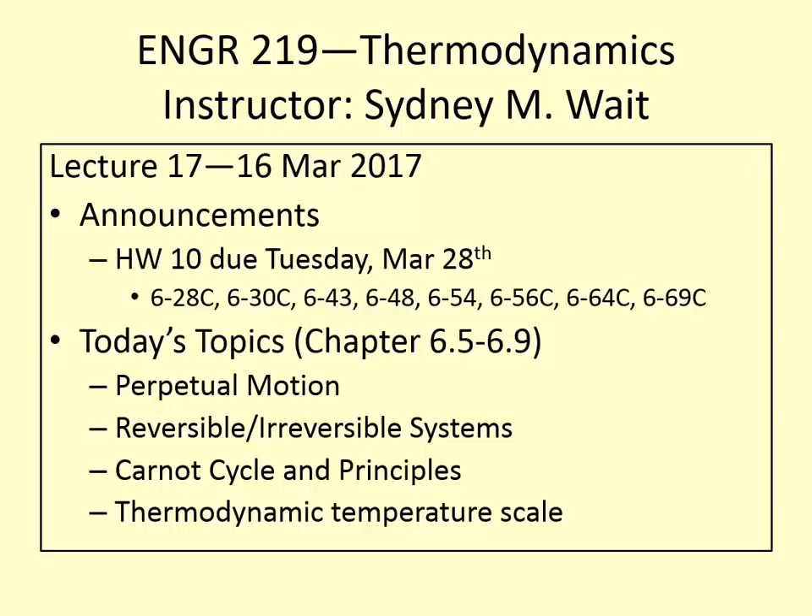But you must be in the photo, so I don't want you to just go on the internet and grab a photo of a wind farm and say, I saw a wind farm on spring break and here it is. No, that's not going to work. You need to be in the photo so that I know that you actually witnessed it, you saw it, you found it, you went out and searched for it. So again, this is all bonus points. And then you submit a one-page write-up discussing the energy setup. So if there are any interesting details that you know, that possibly whatever company it is has some facts on their website about what they're doing, or if you know or can look up information about solar panels or solar arrays in general, then just do a one-page write-up that has some interesting details or facts about it.

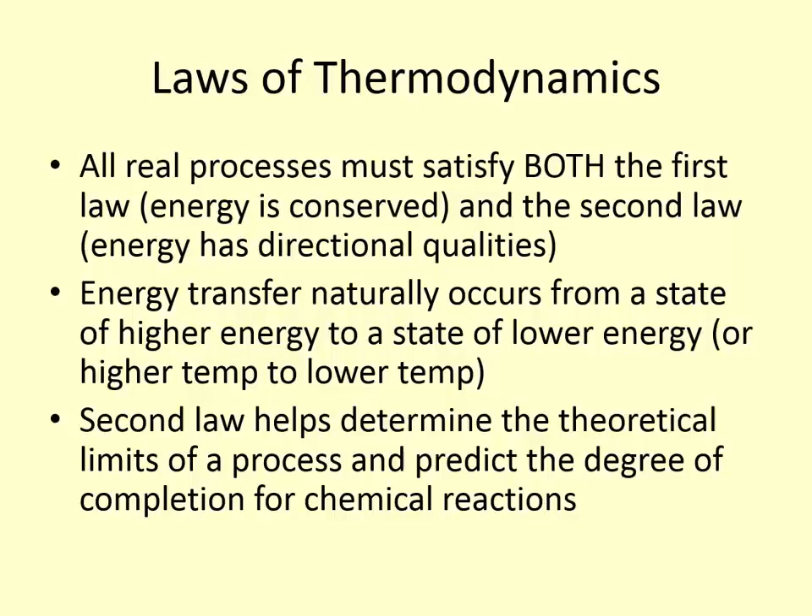So in many cases, the perpetual motion devices or the theoretical machines that a lot of people present, they work from an energy balance standpoint. They satisfy the first law. And so it's a little bit more difficult to understand right offhand why something like that can't work. But if we're also looking at the second law and understanding that energy has direction, then it's a little easier for us to look at those things and understand.

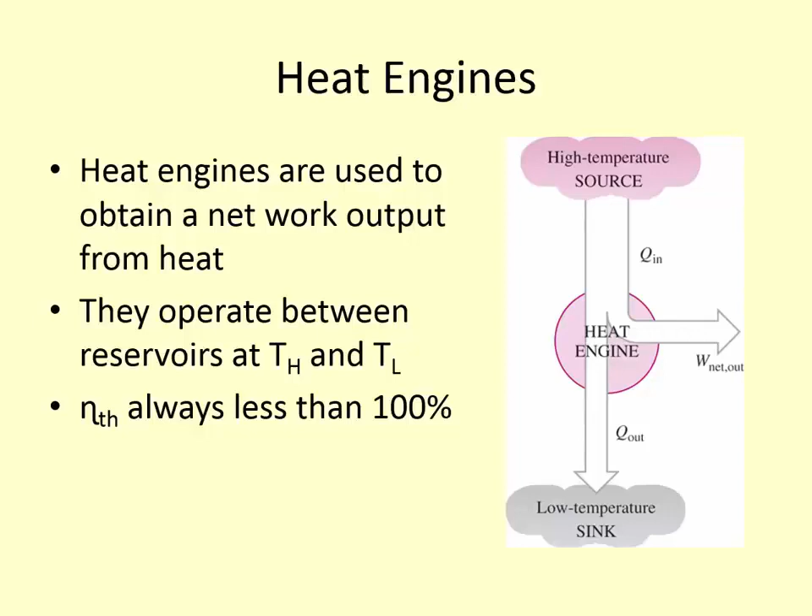So heat engines, that was the answer on the first part of the quiz. It's the necessary device in order to take heat and convert it to work. So they always operate between these temperature reservoirs, and they always have an efficiency that's less than 100%. Heat pumps and refrigerators are used to reverse the direction of heat flow. So it requires a work input in order to take heat from a cold space and put it into a warmer space. So essentially we're making heat flow uphill or upstream, and it requires work in order to do that.

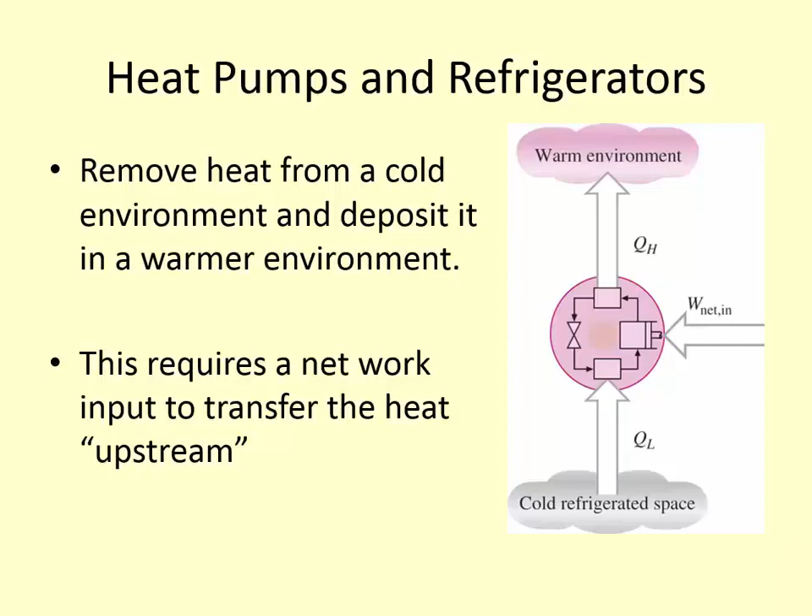The thermal efficiency for a heat engine tells us how much of that heat we can possibly convert to work, or how efficient or effective it is at converting heat to work. It's always less than 100%. In many cases, it's closer to like 30% for real processes. And then refrigerators and heat pumps have something called a coefficient of performance, which is slightly different.

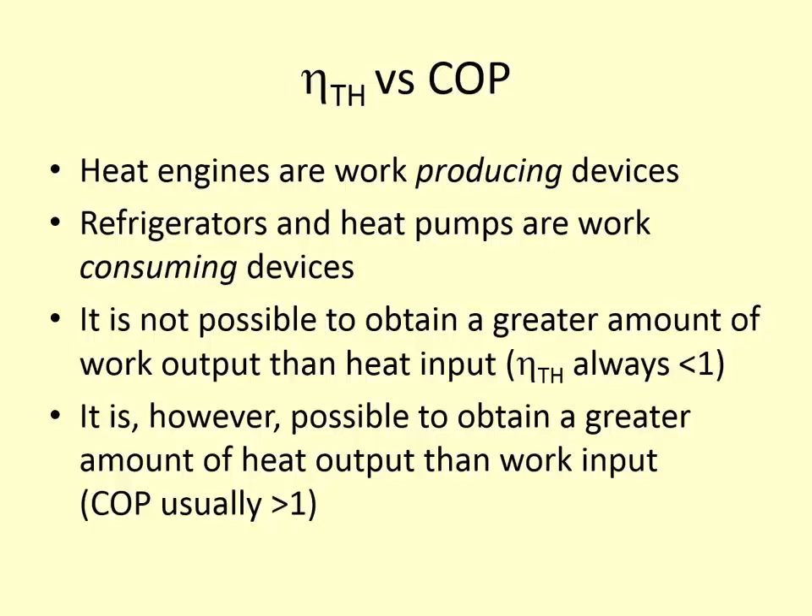But again, if we're thinking about the base definition of efficiencies and performance markers, it's the desired outcome over the required input. So if the desired outcome is to put heat into a hot space, like it would be for a heat pump, then we use QH over the work in. And if the desired outcome is to remove heat from a cold space, making it colder, then it's QL over work in. And a coefficient of performance is most often greater than 1. In fact, if it's less than 1, it means we're doing worse with our cycle than we could if we just converted all of the electricity into heat, as in the case of a heat pump.

Perpetual motion devices, sometimes also called over-unity machines, are those that violate either the first or the second law. And so because real processes have to satisfy both the first and second law, any device that violates them will be called a perpetual motion machine. And if it violates the first law, meaning it's somehow getting more energy out of it than you're putting in, then we call it a perpetual motion machine of the first kind, or PMM1. And if it violates the second law, then it's a perpetual motion machine of the second kind, or PMM2.

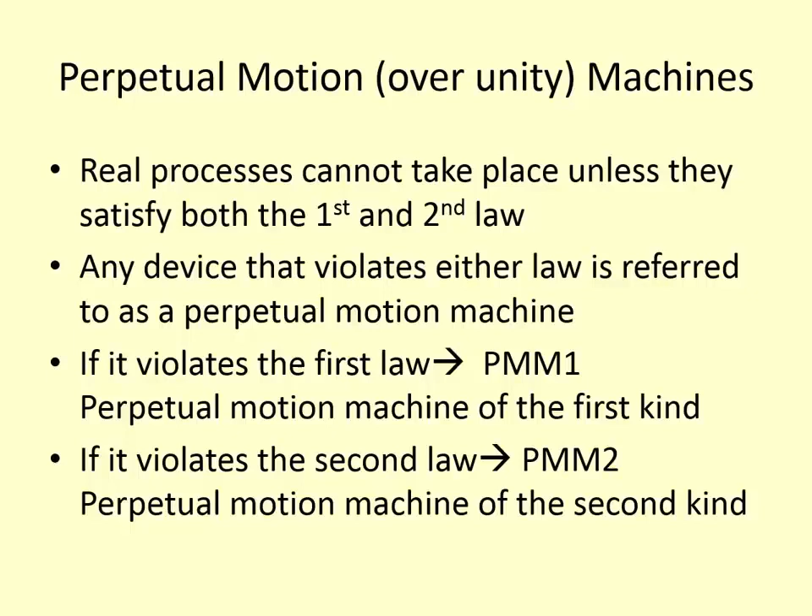So something that would violate the first law, for example, would be like if you can put 10 kilowatts into a machine and somehow you get 20 kilowatts of usable work out of it. So you're only putting in 10 kilowatts. You're not adding any additional heat, and you get a greater output. Something that would violate the second law would be like if you have some device that somehow, without any work input, transfers heat from a cold space to a hot space. So as we look at some of these machines or some of these devices, we can determine if they're of the first kind or the second kind.

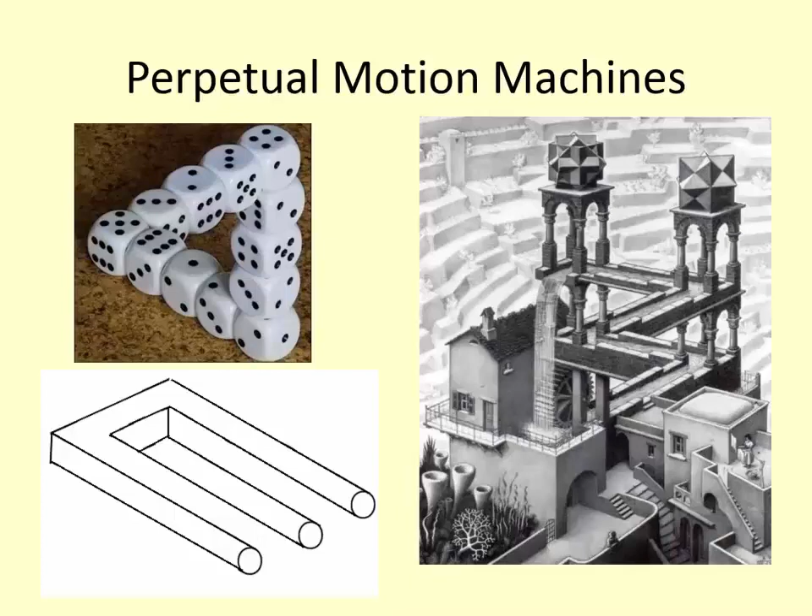And then this little tuning fork kind of thing on the bottom, where at first it looks like it's 3 cylinders, but then when you look at the opposite end, it's actually a U-shaped bar. So on paper it works, right? It's kind of a cool little mind trick, a little illusion, but it couldn't exist in real life. You can't have something like that in 3 dimensions when you consider things in real life.

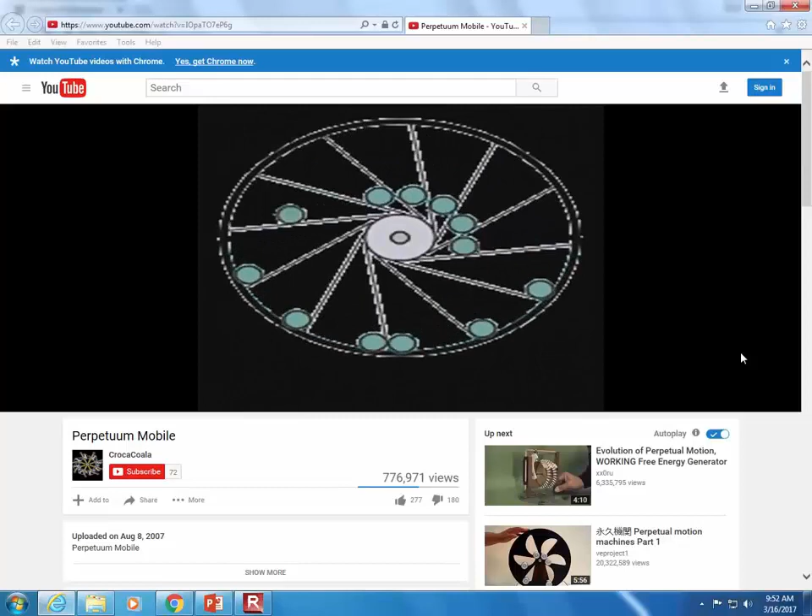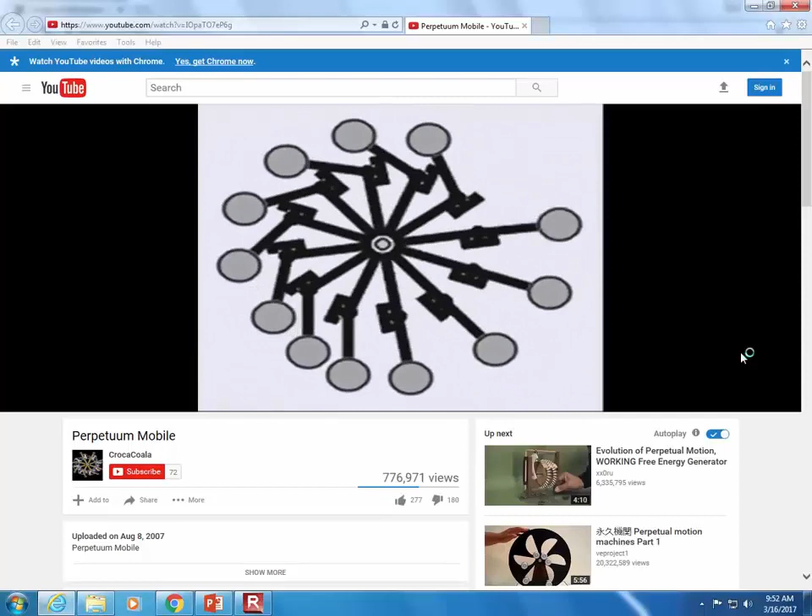Okay, so let's look at a couple of examples of the different types of perpetual motion machines, so whether they violate the first law or violate the second law. This one violates the first law, and I want you to just look at it for a minute and see if you can figure out even what's supposed to be happening in this particular device.

Right, okay, so we can look at this as just like a regular heat engine, right? So we have a turbine and a pump, and we're pumping water through this boiler, and somehow we have to heat up the water in the boiler. So the idea is then, okay, instead of using fossil fuels, why don't we just tap into the generator to heat up the water in the boiler so that we don't have to use a secondary furnace or burn anything or cause pollution? So we can just use the energy that's created by this cycle in order to heat the water in the boiler, right? Sounds great, doesn't it? Okay, so what happens if we draw a system boundary around this whole thing? What do we have?

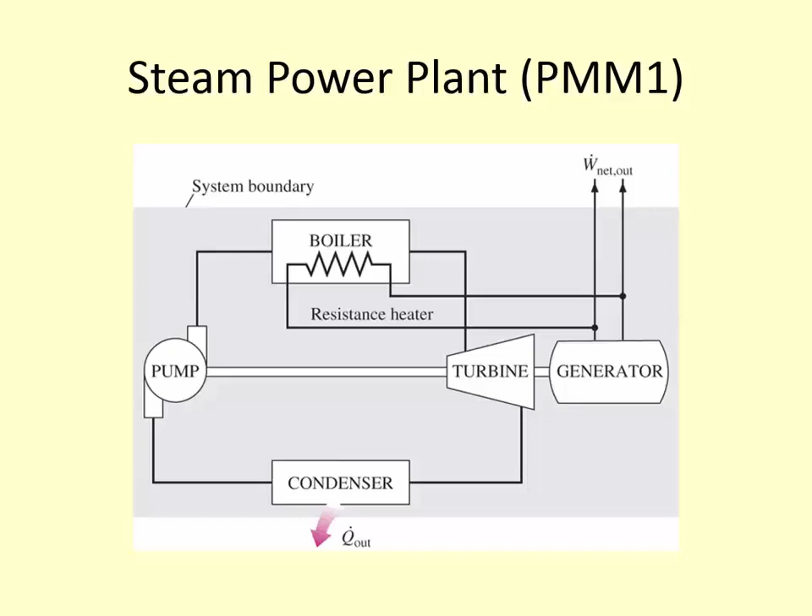Then we have another steam power plant, and we looked at this example a couple of lectures ago where we just removed the condenser and decided that we don't want to reject heat to the environment. We see that we have a power plant that receives heat from a single source and produces a net amount of work, which violates the Kelvin-Planck statement, which in turn violates the second law of thermodynamics. So it would be a perpetual motion device of the second kind, a system that cannot exist in reality. We can draw whatever we want on paper. We can design whatever we want in a computer simulation. That doesn't mean it can exist in real life on this planet.

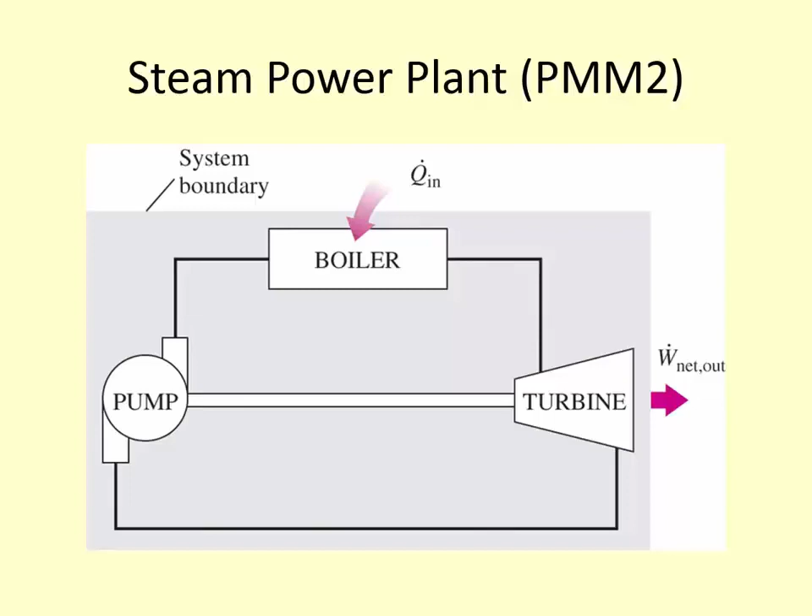So that leads us to a discussion of reversible and irreversible processes. A reversible process is one that can be returned to its original state without leaving any trace on the surroundings. A completely reversible process is one where the system and the surroundings are each returned to the original state and it's like nothing has ever happened. Internally reversible means the system can be returned to its original state. Externally reversible means the surroundings can be returned to their original state. And totally reversible is the case where the system and the surroundings are each returned to their original state, as if no process ever happened.

So what does this mean, and how does it apply to real life? Well, there are processes in real life that are internally reversible or externally reversible. There are very few, actually no processes that are totally reversible, but there are some that come to a very close approximation. However, those processes that are totally reversible are very idealized, best case scenarios, and in general you can't actually use them for anything other than running experiments. As soon as you try to achieve some net amount of work from them, or try to harness the energy in some way, then you're adding irreversibilities to the system so that it's not a totally reversible system anymore.

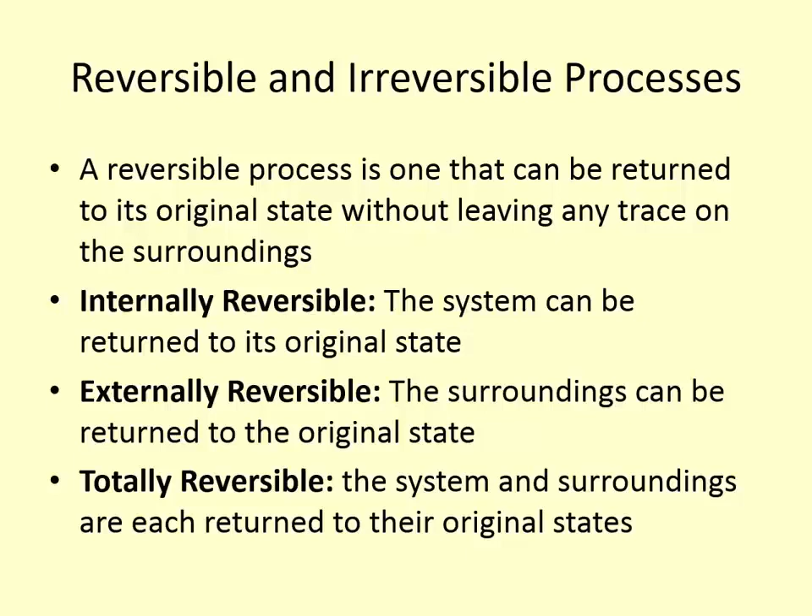A good example of that would be those spinning wheels with the pendulum weights, which can be approximated as totally reversible if they're very frictionless and we don't have any wind resistance and things like that. However, the moment you try to do anything with it, it becomes an irreversible system. You're adding irreversibilities to it. So real life is full of irreversibilities. A reversible process will provide the best case scenario. In the case of a work producing device, you'll get the most amount of work. And in a work consuming device, you will consume the least amount of work for any process.

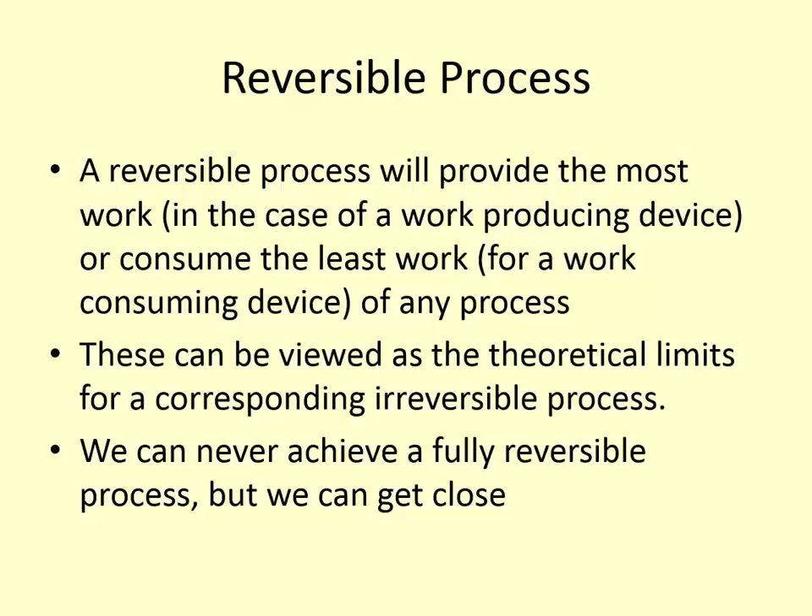So we still like to study reversible processes because they provide the bounds which we can design between. We can know, okay, this is the most amount of work I'm going to get out of this system. What I'm getting is this. Is that okay, or can I try to do better? So they provide us these theoretical limits, and although we can never fully achieve a reversible process both internally and externally, we can get pretty close. And that's the idea, that's the design process, trying to get as close to a reversible process as we can while balancing the cost of the project, because sometimes eliminating irreversibilities increases costs significantly.

So what are irreversibilities? Friction is one that we're all familiar with and probably is the first one that comes to mind. Friction is an oppositional force between two bodies in contact, and it leads to heat. Heat, again, is a very low quality form of energy. In most cases, when we see irreversibilities, it's because we have heat transfer, or somehow our work is being converted into heat. The same goes for friction—this motion or momentum force is degraded down to heat, so we lose some of our energy in the process due to heat.

Unrestrained expansion, so when there's rapid changes in pressure, it can lead to significant changes in temperature, which again is manifest as a heat loss. Electric resistance also leads to heat loss.

Heat transfer is always a one-way process, so unless we have work involved to reverse the flow of it, it can only proceed in one direction. As soon as we try to reverse the flow of that heat, we automatically lose a significant chunk of our energy, because once it's degraded from a high temperature to a low temperature, we can move part of it back up using work, but we can't do it 100%.

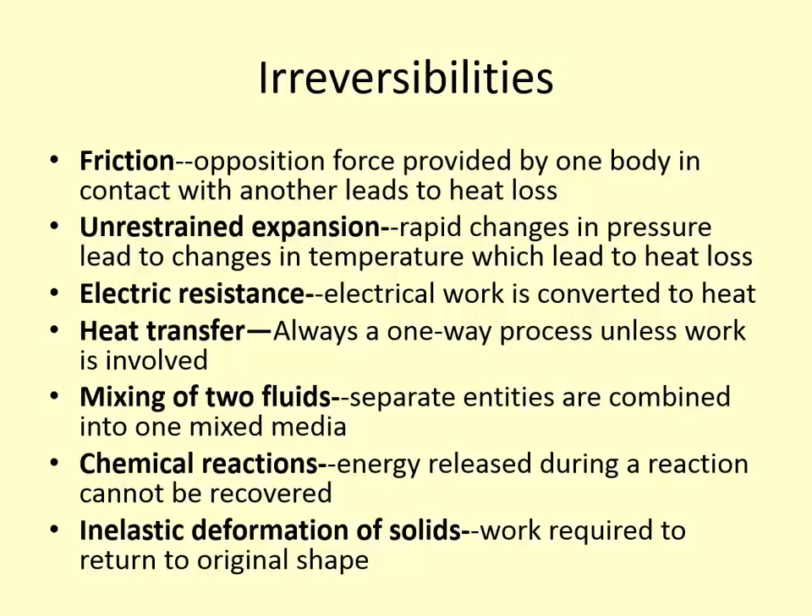Some reversible approximations are necessary in design. When we talked previously about a quasi-equilibrium process, that's one of the approximations we made early on to assume that our process was kind of reversible, or quasi-equilibrium. If we do this process slowly enough with minimal friction, then we can approximate it as reversible. The second law of efficiency will tell us how close our actual process can be to the one modeled by a reversible one. So if we look at it in the reversible case and then calculate our second law of efficiency, we'll see how close we can possibly get in real life.

The classic example of a quasi-equilibrium process would be moving wall. If we move it slowly, the water level just rises slowly. But if we move that wall quickly, expanding and compressing too rapidly, then the water begins to oscillate, and it becomes an irreversible process, because now we have these momentum forces that are causing our motion to be less efficient.

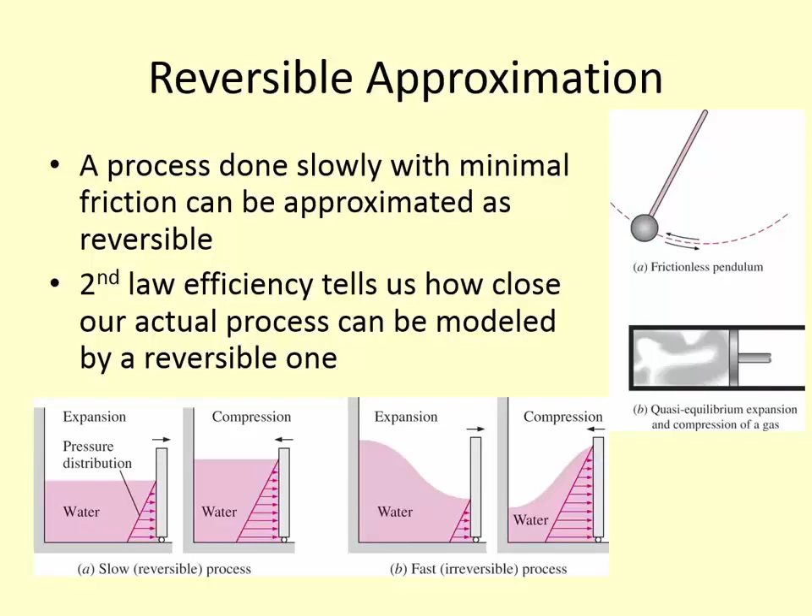Heat transfer processes are always irreversible, but as the temperature difference goes to zero, it becomes more closely approximated by a reversible process. So if you're transferring heat from a body at 20 Celsius to another body at 20 Celsius, then it can be considered reversible. However, very few systems in real life have infinitesimal temperature differences where heat transfer is concerned. So it's a good approximation, but in practical analysis and design, we don't often encounter that in real life.

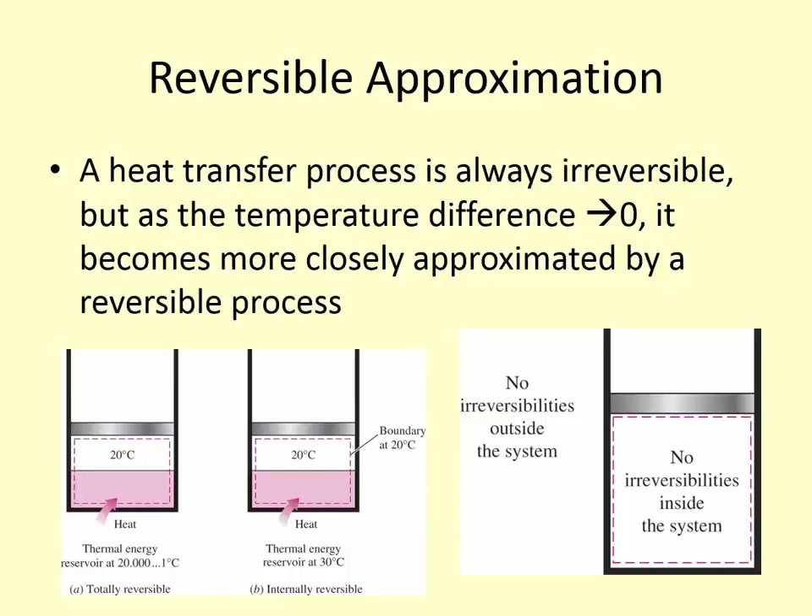So we can do our best, and say, okay, maybe our process is not totally reversible, but we can say that we don't have any irreversibilities inside the system. Our piston is a frictionless piston cylinder device. Or we can say there's no irreversibilities outside the system, that there's no external momentum forces or things like that. Again, we're making approximations both to simplify the analysis, but also to show us the best case scenario, and also to have us take special note of the things we can work on.

So if we make a reversible approximation and then run our real simulation or real analysis and we see all these differences, then we can say, okay, we assumed it was frictionless—where's the friction in our design, in our system, and how can we reduce it so that we can get closer to these values? Which leads us to an idealized reversible cycle. The Carnot cycle is one that is often used in design and analysis to give us our best case scenario.

of a heat engine, heat pump, or a refrigerator. And we first talk about it as a heat engine.

So from state 1 to 2, we add heat from a source at T sub H, and because we're doing this, we maintain the temperature as constant during an expansion process. So state 1 to 2 is reversible isothermal expansion, meaning the temperature is constant and it's expanding, so the volume is getting larger during that process.

State 2 to 3 is reversible adiabatic expansion. Adiabatic means there is no heat transfer. So we're continuing to increase the size of our volume. However, we're not adding heat anymore, so the temperature is allowed to drop. So T sub H goes to T sub L.

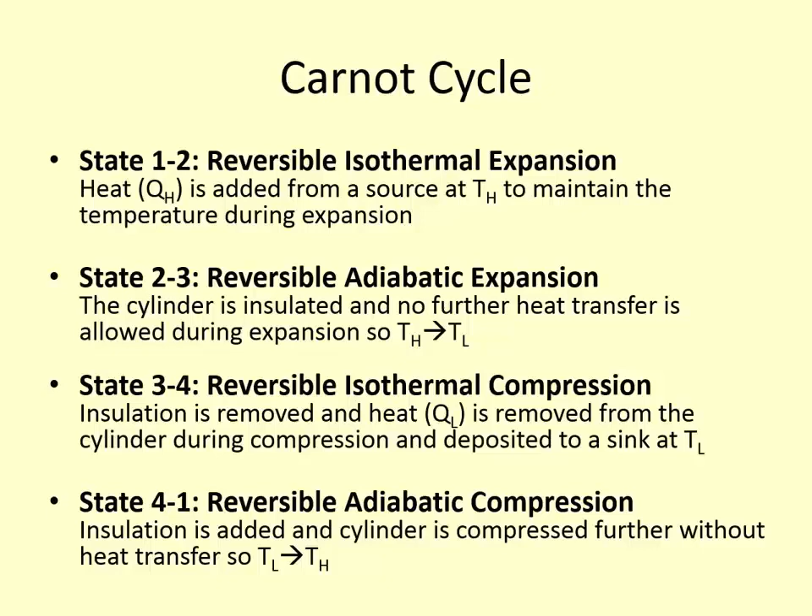And then state 4 to 1 is reversible adiabatic compression. So we no longer allow heat transfer to occur, and as we compress our system, our temperature goes back to T_H. So we're returning back to our initial state, state 1. It's a 4-step cycle, so there are 4 different processes involved in the Carnot cycle, as dictated.

So if we look at the Carnot cycle on a PV diagram, we can see 2 different possible cases: the Carnot cycle and the reverse Carnot cycle. The Carnot cycle is what is used to model heat engines, and the reverse Carnot cycle is used to model heat pumps and refrigerators.

You can see what it looks like on a PV diagram, and if you remember from previous discussions and from the exam, the work, or the area under the curve on a PV diagram, is the work for the system. In this case, because it's a cycle and we return back to our initial state, it's the area encompassed by all 4 parts of that cycle that gives us our net work out or net work in, depending on which direction the cycle is operating.

So you can see how Q sub H is added from state 1 to 2. And that line is not a linear line. It's an isothermal expansion, usually of an ideal gas, so it has this logarithmic relationship between pressure and volume.

So the Carnot cycle becomes very important to us in the next couple of weeks. It's one that we use in order to provide a best case scenario, but it's also the start of using these property diagrams to look at cycles from a holistic viewpoint, and say, okay, if I look at what's going on in this system, if I plot the points and the process path, then I can get a better view of how my system compares to other similar processes or similar cycles.

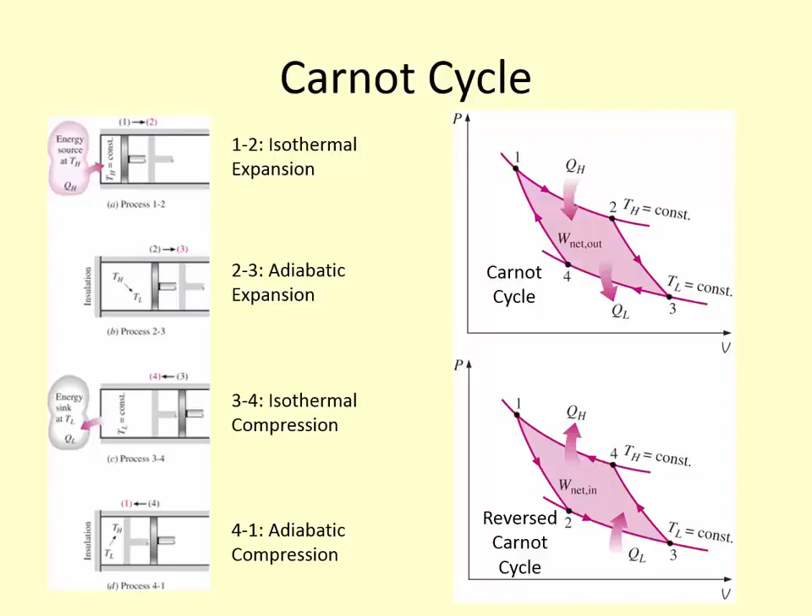So there are some principles associated with the Carnot cycle. The first is that the efficiency of an irreversible heat engine is always going to be less than the efficiency of a reversible heat engine operating between the same 2 reservoirs. So if you have an irreversible heat engine and a reversible heat engine operating between the same temperature difference, the reversible heat engine is always going to have a greater efficiency, in other words. That's the first Carnot principle.

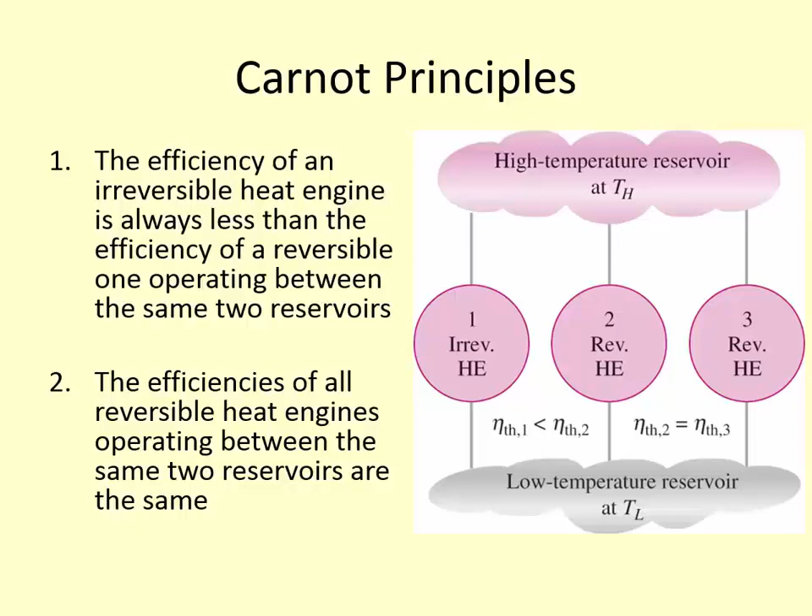The second Carnot principle is that the efficiency of all reversible heat engines between the same 2 temperature reservoirs is going to be the same. This means the thermal efficiency of these heat engines is no longer dependent on how much heat is transferred, but just the temperature of the reservoir itself. We'll look at those definitions when we continue after spring break, but we'll touch on it briefly here.

So there's a proof for Carnot principle 1, which is also in your textbook. I don't think we necessarily need to go through the proof for that. But essentially, if you take an irreversible heat engine and combine it with a reversible heat engine or a refrigerator, you can find an equivalent combined system which accepts heat from a low temperature reservoir and has a net amount of work.

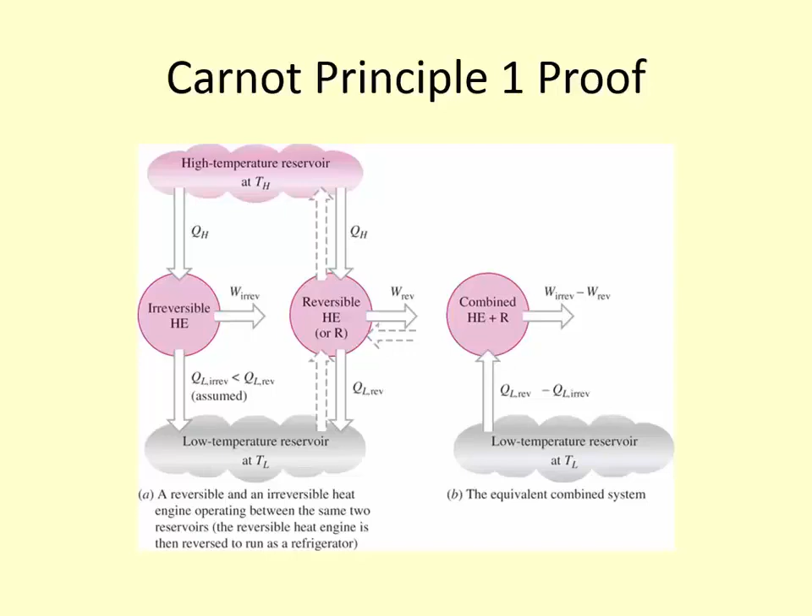So you can show that it is in violation of the second law. Similar idea with the second proof.

So let's talk about the temperature scale. We know how important it is when we're working with ideal gases to use the correct temperature scale, right? So if you use Celsius in a problem for ideal gas, then you get the wrong answer. And so maybe you think, oh, well, it's just important because it's some arbitrary thing. Like we've just decided that we have to use Kelvin instead of Celsius, so now this equation doesn't work because it's based on Kelvin. Well, yes and no.

In thermodynamics, we have to have a scale that's independent of the properties of a substance. So if we look at water, or we look at air, or we look at orange juice or mud or whatever it is, they have different freezing points, different liquefying points, different vaporization points. The Fahrenheit scale is based on the freezing point and the boiling point of water. The Celsius scale is the same way. But why is water chosen as the ideal fluid to base a temperature scale on for the rest of substances?

So the thermodynamic temperature scale is independent of any kind of substance. It's based on absolute zero, which is the point at which all molecular motion ceases for any substance. So for air, for nitrogen, for water, for refrigerants, that absolute zero is absolutely zero for every substance. And so we have to use the thermodynamic temperature scale in that way because it's independent of whatever the properties are of any substance, that there's not some set boiling point on that scale. There's only a set zero.

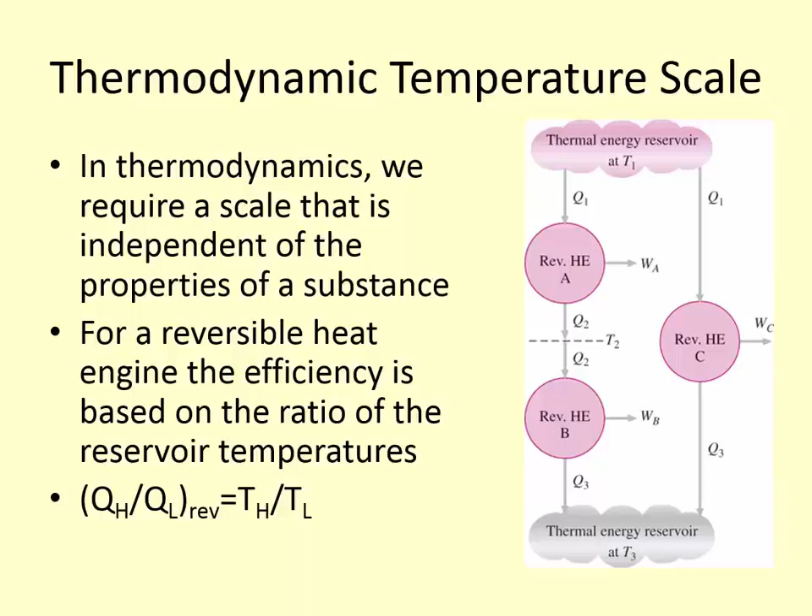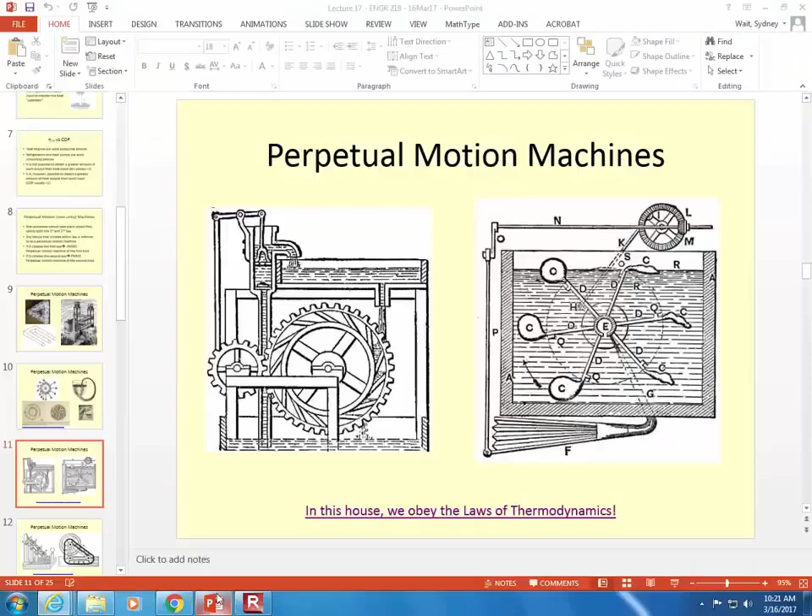Okay. So have a good spring break. Work on those bonus quiz points if you choose. And I'll see you a week from Tuesday with your homework. No, it's not 70. Do you want us to email them to you or bring them to class? Bring them to class. So there it is again, if anybody missed it. Take a picture of it or something.